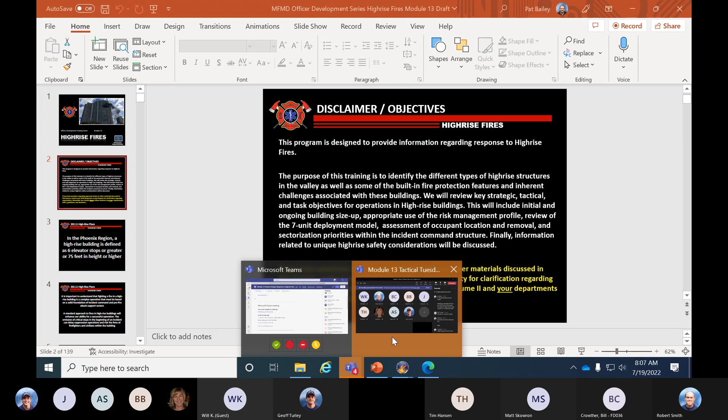Somebody, if you'll mute your mic, if you would, somebody out there's got your mic on. This is where it comes up missing. Let me see here real quick. Sorry, we can figure out who it is here. Anyway, please mute your mic. Sorry, please mute your mics here for those of you that aren't doing that.

But anyway, so we do East Valley Command training, and we covered high-rise fires. And then in an effort to try to stay consistent with our company officers, we're going to do high-rise training here in Tactical Tuesday as well.

So the biggest difference, you guys, and this is Captain Obvious stuff here, but obviously as we manage incidents in high-rise, they're much different than anything we do from a residential, even commercial perspective. They're a completely different type of event, which creates a number of challenges for us that are not readily seen in our typical fires that we respond to.

So you'll see some of the stuff we talk about here today. We'll talk about some built-in fire protection systems, some of the challenges with these buildings. We'll talk about strategic, tactical, and task objectives. We'll talk about some of the building size up, risk management profile, the 7-unit deployment model. We'll spend a lot of time talking about that this morning. And then we'll talk about some of the unique high-rise safety considerations and other things that come into play.

So with that, we're going to go ahead and get started. Once again, if you have questions, you can either send them to the chat. I've got Captain Paul Liddell with me here that'll try to monitor the chat. And if you have questions, you can certainly send them there. Or if you're not able to get through to him, just unmute for a second and ask the question, and we'll try to address anything you may have.

So in the Valley, we consider a high-rise in the Phoenix region anything that's defined as 6 elevator stops or greater, or 75 feet in height or higher. So once again, we've got a number of these. In the East Valley, we've got probably half a dozen or so, maybe if we look east of Price Road, a few more than that. But as we head west, obviously we get into Tempe. They've got probably at this point close to 50 buildings that are 7 floors or higher, counting ASU and all the new high-rise corridor they have. And then obviously when we get into Phoenix, we have 100 plus.

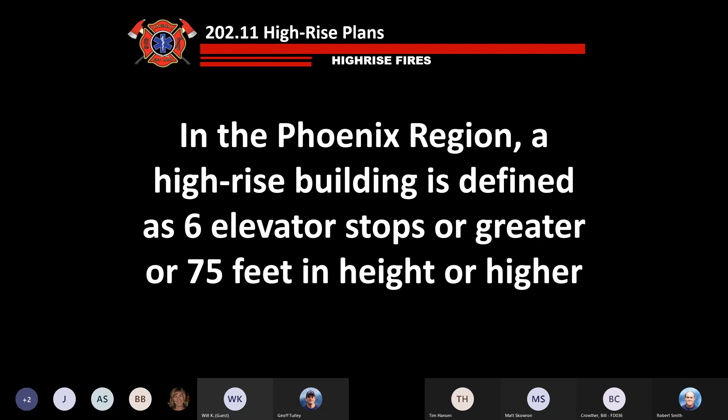But then what happens if I get to the 3rd floor and I run into a patient and things like that? We're hoping to answer some of those questions from the perspective of a company officer that aren't covered necessarily in the high-rise plan, but things you'll be expected to know what to do if we encounter them.

In a high-rise fire, understand that fighting fire in a high-rise building is a complex operation. That's an understatement. It must be on a solid foundation, and a lot of the things we do in setting up the fire make the difference in how successful we are in the outcome of the incident.

This is why you'll see the high-rise plan, which was developed about a year and a half ago now. This is a ROCC, our Regional Operations Consistency Committee, that put this plan together with a number of all our Valley agencies. So we're all on the same page, hopefully, and that's what we're hoping to see here is a standard approach to high-rise fires, and hopefully we'll have a successful outcome.

So let's talk about high-rise basics for a minute. For the most part, there's about 14,500 high-rise structure fires a year, which results in about 40 deaths, 520 injuries, and $150 million in property loss.

Probably pretty obvious if we were to ask what types of buildings create the most high-rise fires, and that's going to be apartments with 62%. We got some motel, hotel fires, dormitory fires, care facilities, and then office building fires make up the majority of our high-rise fires. And this probably isn't surprising either, that the leading cause of all high-rise fires is cooking, which connects with the apartment fire bullet point above.

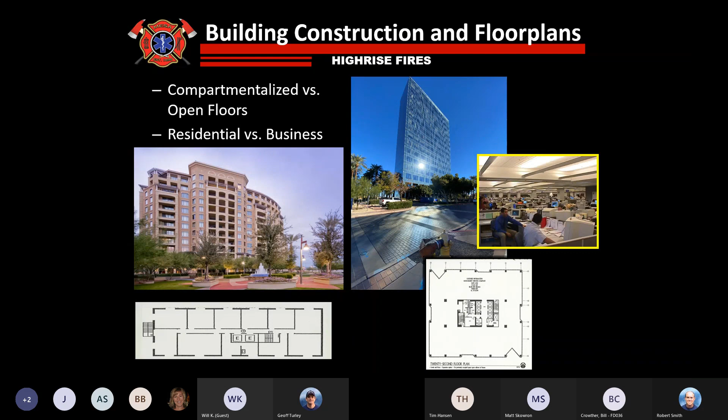When we did fire drills over there, it's pretty amazing to see, because some of those buildings hold over 5,000 people when fully occupied. So you can imagine when you hit the fire alarm and try to evacuate those buildings - and we've done that a couple times during drills - it's pretty amazing to see the number of people that actually come out, and you can also imagine the challenge of trying to enter through the front door and go up the stairs when all these people are trying to come out. So some of the challenges that come along with something like that.

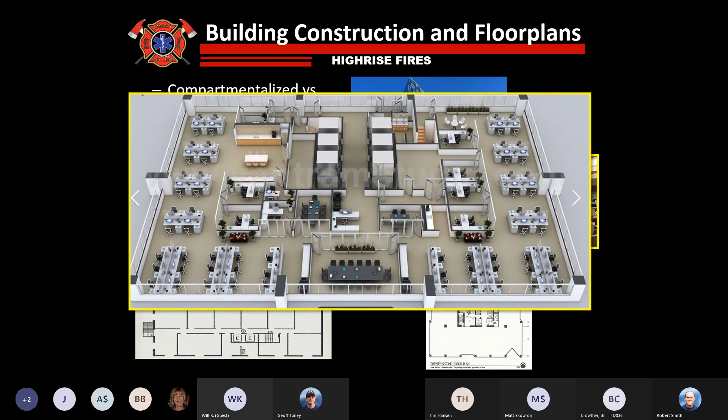This is just a floor plan of a high-rise structure, so you can see not only the layout, but some of the confusion you might have in a limited visibility situation, whether you're trying to gain access to a fire or conduct a search. It's somewhat similar to a restaurant fire, trying to work a hose line through the dining room - very challenging as you work your way in. There's chairs, other obstructions, 150 different hiding places for people to be. Very difficult to search a floor like this or address a fire in a floor plan of this nature.

A couple other things to consider with some of the floor plans - this is a couple examples of floor plans of some high rises in Tempe right now. You can see the cubicle farm kind of in some of these areas, and just the sheer office space. Some of these structures have over 10,000 square feet per floor. If you start doing the math, it's basically 2,500 square foot houses spread around throughout a structure. So as we talk about the difficulties of not only fighting fire, the amount of sheer fire load and other challenges, we're also talking about the ability to search an area of this size, which is going to require a number of crews, certainly if you have any limited visibility at all. But you can see the floor plans on just a couple of these here.

Another thing you might see on some structures, typically commercial buildings or maybe a real high-end residential structure, are convenience stairs. Convenience stairs are stairwells that connect two floors without a vestibule or a contained stairwell - you can see that upper picture on the left there. You'll see this a lot in law offices where they'll have offices over 1 or 2 stories, maybe even 3, with a stairwell connecting both that isn't an enclosed stairwell. That creates some problems for us as far as fire spread and other things, obviously, if we have a fire on that floor.

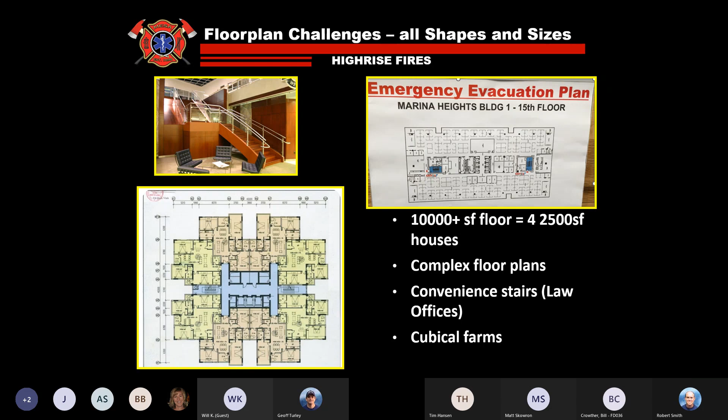We talk about configurations of structures. Obviously, if you look at the high rises around the valley, there's every shape and size that are out there.

This is one that I spent a tremendous amount of my time during my career. I spent the vast majority of my 37 years in Tempe downtown, so I've probably been to this building 50 times plus for some types of events as far as fire events. They have a trash chute that burned every 15 minutes during the school semester. They've remodeled it and sprinkled it now, but there were certainly some challenges that we had early on in this building in my career. We'll talk more about some of the challenges associated with these types of buildings in a few minutes as well.

Core construction. High rises have about 1,000 different configurations, but one of the things they started doing in the 80s was core construction. With core construction, you basically have all of your elevators, stairwells, plumbing, bathrooms and stuff in a center core, and your offices and other things around the outside. The good part is it gives a lot of window space for offices from a leasing perspective. The bad thing from our perspective is that fire can burn around you and behind you if you're not careful. So when we're having fires in core construction structures, we need to be careful if we get out on the floor, out of the stairwell, and understand there is a possibility the fire can come around behind us.

When we're talking about core construction fires, if we actually have a significant working fire, we would strongly suggest getting a second line in place prior to making that fire attack, so you have the ability to have someone protect your backside and we don't get ourselves into a bind.

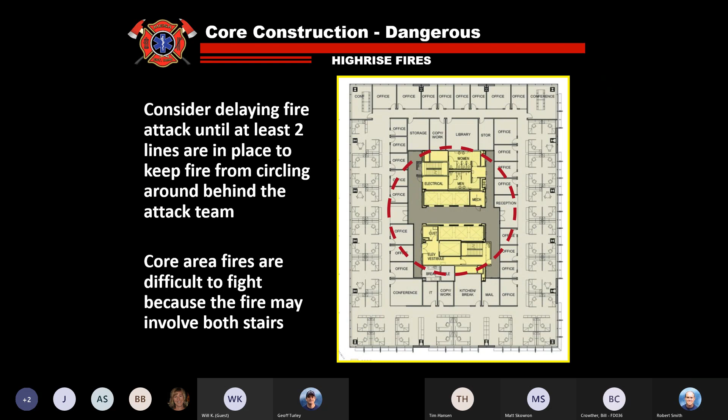We talk about some of the center hallway stuff. Like I said, you see this a lot with residential construction, and typically your stairs are going to be located on either end of the building. Sometimes you'll see some in the middle, depending on the length of the hallways. But these give us a different perspective for our fire attack. This is when we talk about selecting our attack stairwell versus evacuation stairwell. This is one of those where it's sometimes a challenge for us to determine the correct stairwell to operate out of.

We had a Tempe high-rise fire just a couple of months ago, and we'll talk about this later in the class. One of the challenges they had is they started stretching lines, got the line to the interior, made the fire attack. But as they were cleaning up and finishing up inside the apartment, one of the crews came out of the door literally across the hall, which was another stairwell. So they stretched 150 feet of 2.5-inch line all the way down the hallway to get to the fire apartment, and they were literally probably 12 or 15 feet from another stairwell that they didn't choose for the fire attack stairwell.

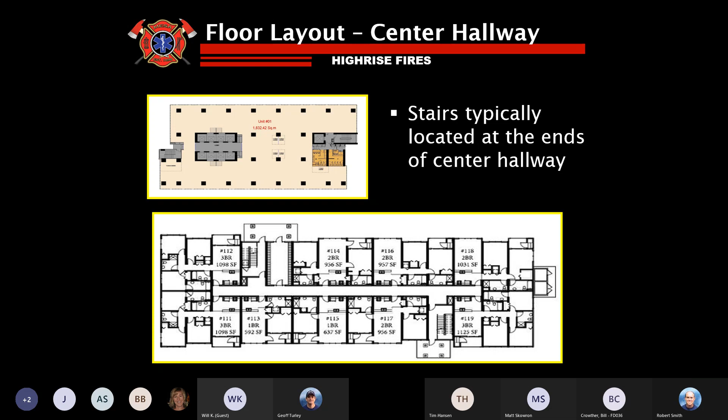So sometimes it's going to be a little difficult for us. We'll talk about stairwell teams and choosing the right stairwell in a few minutes, but just understand that some of these buildings can be very complex, and we may have to do quite a bit of work to try to get in the right place to operate.

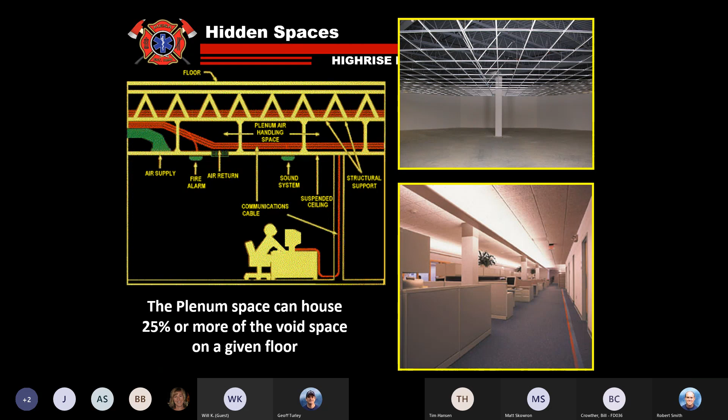Another challenge we have in high rises, especially commercial high rises, is the plenum space. For commercial buildings, some of them utilize the overhead spacing for cabling and other things of that nature. With drop ceilings and other stuff, we can have challenges with the void space being almost 25% of the floor area. So we need to keep that in mind as we talk about hidden fire and fire spread, making sure we're taking control of and looking into the plenum spaces overhead as well.

This is another slide here that I wasn't aware of as far as some of the challenges associated with this, but one of our chief officers, Chief Slayer, had talked about meeting with FDNY, and one of the things they talked about in some of their commercial structures is the overhead cable trays and the ones below the floor as well.

They talk about how 1 foot of this cabling can create up to 150,000 BTUs, equal to about 1.1 gallons of gasoline. So imagine places like State Farm and other data centers, we might have a tremendous amount of fire load either under the floors or above our heads that we're not aware of. We need to keep that in mind.

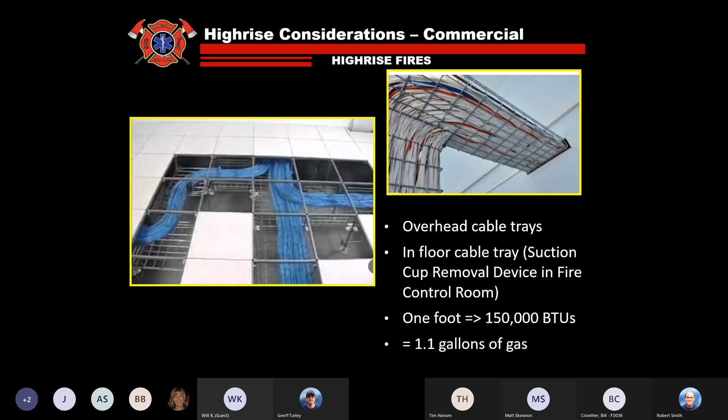One thing he told me, and I've never seen this personally, is that buildings with an in-floor cabling system like that are required to have a suction cup removal device in the fire control room. I haven't seen it myself, but my understanding is they should have it by code. As you go into the fire control room, you may encounter something that looks like a couple of suction cups with a handle that you use to remove the panels to access the subfloor.

Now that we've learned a little about the basics and some historical fires, we're going to talk about fighting fire in a high-rise building. We don't do a lot of this. This is a high-risk, low-frequency event.

I've been in the fire service now for 40 years, and I personally have only been to probably less than a half dozen that would be considered working fires, and most of those were a kitchen fire or something small that didn't extend out of the apartment involved. I was on the fire department when the Bank One fire happened in Phoenix and a few other sustained fires occurred, but I did not respond to them. I've probably been dispatched to between 50 and 100 high-rise fires, so I've been to a lot of them, but as far as actual working sustained fires, there aren't a lot of people in the fire service who have actually been to these in the East Valley or anywhere in the Valley.

So we'll talk about balancing early and often. We're going to talk about resources a whole lot today. Resources are one of those challenges we have on any significant fire. In one of our last classes we talked about big boxes and the resources required for big box incidents, but high-rise fires are even more of a challenge for us than that.

If somebody can mute their mic out there, if you would, for us.

So anyway, if you get dispatched to a high-rise fire, and while responding you happen to see any indications of a working fire, I would tell you to upgrade the incident to as much as a third alarm. I know most of our company officers probably wouldn't feel comfortable doing that. I'd certainly hope you'd go to at least a first alarm, but our command officers will, if you don't, take it right to a third alarm, because the resources required on an actual working fire are going to be a great requirement for us.

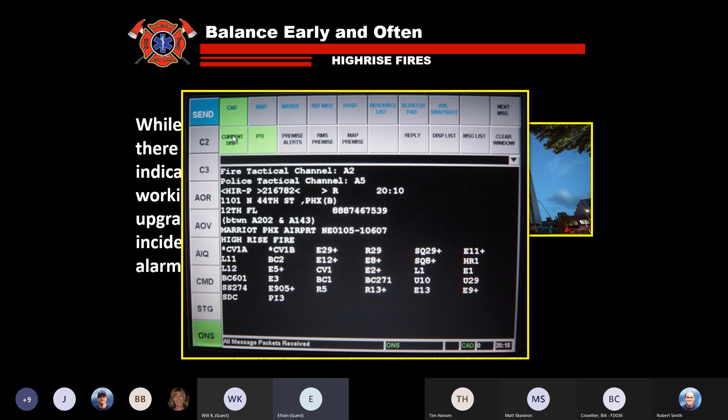This is an incident I had years ago, just to show you. The initial dispatch on this incident was at the Marriott. It said it was going to be a working high-rise fire, and there were 31 units dispatched on the original dispatch for a first alarm working fire. We got this on the MCT, which was interesting because it said there was actually active smoke and fire on the 12th floor. We thought it was going to be pretty interesting. You can see a lot of units on the scene. It ended up being just a small kitchen fire that was extinguished by the sprinklers.

But these are resource-heavy events, so just be aware of that. Don't be surprised if you have a lot of units come in, and don't be embarrassed if you call for several alarms when you see signs of a working fire, because they're going to be needed if we actually have a working fire.

One of the things we talk about here is balancing early and often. One thing we do right now, if we have a working fire in a residential structure or apartment complex, modern fire attack has determined that if we can knock the fire down early, that'll reduce the possibility of flashover and other challenges for our firefighters.

A lot of times people don't think about this in a high-rise fire, because we think of the 7-unit deployment model with specific things that need to take place to set us up for success. That's still true, but if you actually have a working fire within reach of a hand line, a 2.5-inch hand line, a stang gun, or even an aerial apparatus, it may be a consideration to implement a transitional attack on a high-rise fire as well, if indicated.

We'll talk more about that in a second. This is Chief Vincent Dunn. I believe he was FDNY - somebody mentioned Philadelphia, but I thought FDNY. Anyway, he mentioned that we need to plan on getting 100 firefighters on the fire ground and operating inside the building within the first 15 minutes of the event to be successful in a high-rise. So 100 firefighters is a lot.

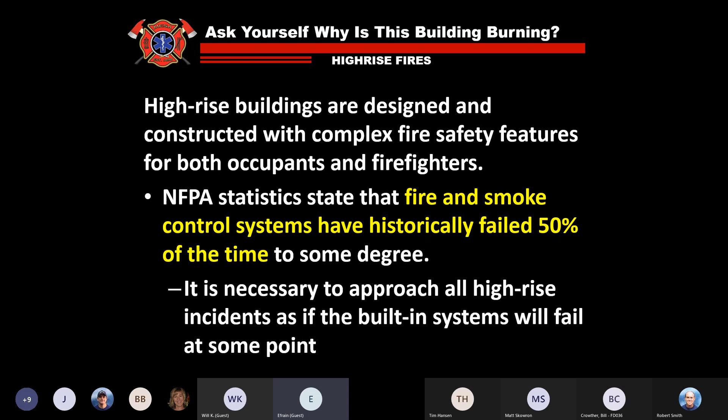But keep in mind there are other reasons we may have a working fire in a high rise that aren't just systems failures. Everything from arson, where somebody brings a 10-gallon can of gasoline up to the 12th floor and lights off a floor, may overwhelm the sprinkler system initially or completely. People may shut down systems for repairs, leaving them non-operational on that floor, portions of the building, or the entire building. The fire pump may be out of service, and other things may cause this. So just understand that built-in fire protection systems may fail.

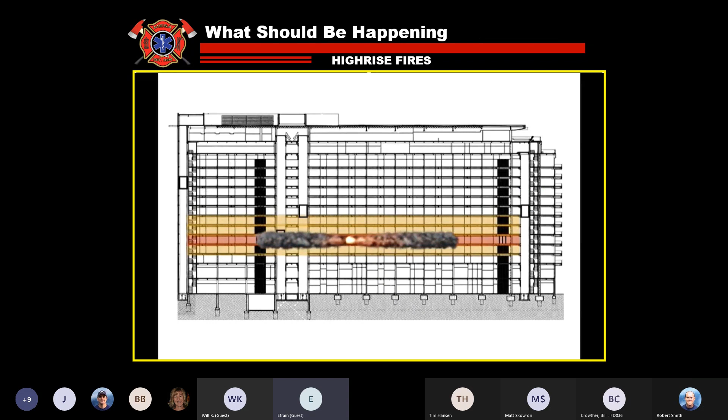I'll run it one more time while we're talking. Understand this is a perfect scenario, and it happens probably the vast majority of the time. Most of our fires in any high-rise building, a kitchen fire or something like that, typically the sprinklers activate, put the fire out, and we clean up some water and a little water damage.

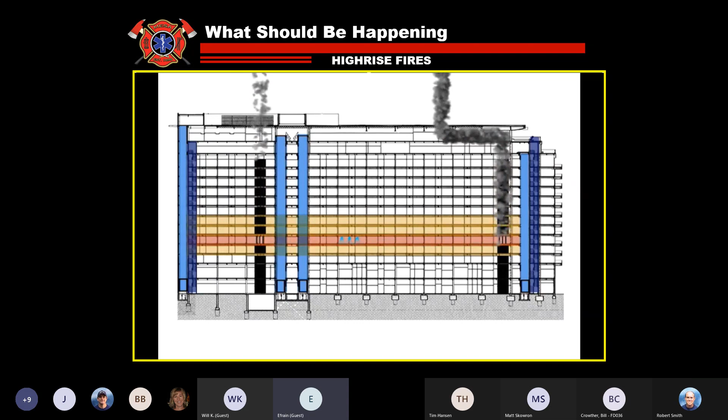One of the things that happened in the Tempe fire was once again sprinkler system failure. A couple of things occurred there: they had a sprinkler damaged near the fire that didn't operate, and another one where the deflector plate had been removed nearby, so it just shot a little laser of water straight down to the floor. Between the cabinet location and everything else, they had limited coverage of that building. That's why they actually had a working fire when they got to the fire floor in Tempe.

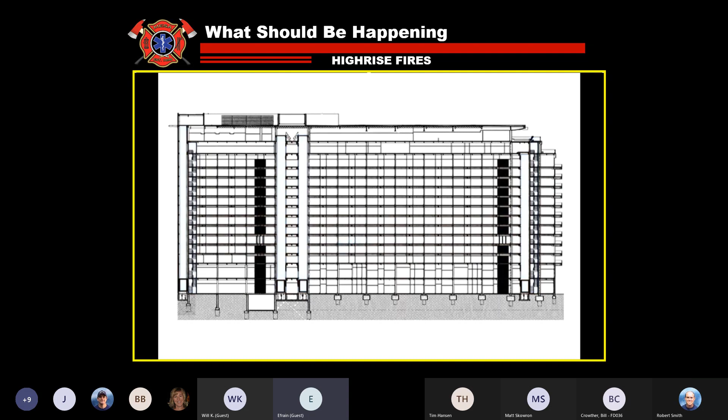For the first-in company, if you work in an area with a high rise in your first due area, I'd hope you become very familiar with that structure. Even if you're in the first 7 companies associated with the high rise, I'd hope you'd work with your responding battalion chief or deputy to tour these buildings and become familiar with all the different aspects, whether it's stairwells, locations, the fire control room, access to the roof, and other things that may be in place, so that if you get dispatched, it won't be your first time seeing them.

High rises are very complex buildings. If you've been into some of the fire control rooms, and I've been into probably 100 plus in my career, they're all different sizes. Some are the size of a small bathroom, others as big as 2,000 square feet. The one in the State Farm building is probably 2,000 square feet, with about 100 different TV screens, staffed 24 hours a day with about 5 people. So it's a completely different situation than other structures, where you may show up with just one annunciator panel and a printer, depending on the building, how old it is, and how the fire control systems are designed.

Keep that in mind as you arrive on these structures. Here's what a first-in company on-scene report might sound like: Engine 201 on scene with an 18-story high-rise building, nothing showing from the exterior, evacuation is in progress. Engine 201 will be University Command, offensive strategy, making our way to the fire control room for the report to follow. The follow-up report may sound something like this.

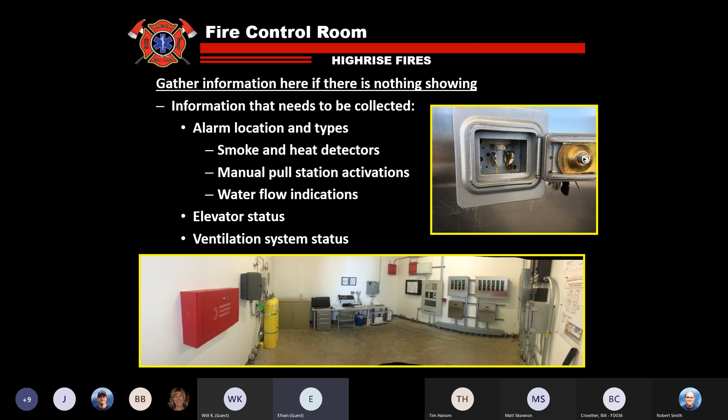One of the first things that first crew needs to do is assume command and start assigning companies. They need to go to the fire control room, locate the alarm panel, see if we have smoke or heat detectors activated, manual pull stations, water flow indications, and those kinds of things, which we'll go through individually here.

So one of the things you have to do, once again, you have the incident commander. One of your firefighters needs to go look at the elevators—make sure they've been recalled through the building alarm, check for smoke and fire conditions in the elevator shaft, whether the ventilation system has started pressurizing the shafts, and whether all the elevators are in phase one in the lobby.

One of the things we have to account for is all the lobbies, all the elevators, and make sure that they're empty. One of the challenges we've had on a number of high-rise fires over the years is elevators not being recalled and people getting stuck in them, or even failing and getting stuck on a different floor, maybe even the fire floor itself. So we need to make sure all elevators are down, open and empty, and in phase one in the lobby.

We'll talk about the fire helmet indicator lights flashing. Some of the new elevators—I haven't seen this on older systems, but some brand new systems have a little helmet icon, which we'll show you in a minute, that if it's flashing, indicates sensors for water, smoke, and heat in the elevator shaft have been triggered. If it's flashing, they're basically telling you not to use the elevators. Those are typically only on brand new buildings.

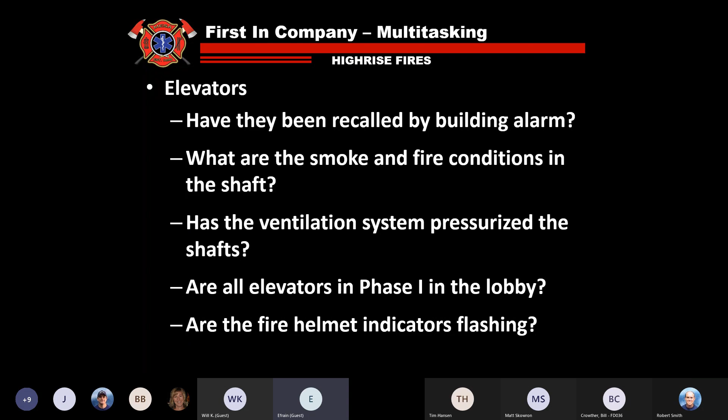Sometimes you'll see the fire helmet inside the elevator door, and sometimes you see it on the outside, this little fire helmet that may be flashing. One of your other firefighters needs to start identifying stairwells.

Just need to figure out how many you have which are marked with roof access. What are the smoke and fire conditions visible from the lobby when you open up the stairwell? Do you actually have smoke in the stairwell already, or is it clear as far as you can see? Which, if any, stairwells are being used for evacuation by the occupants, and which stairs have standpipes?

That's one of the first things we have to do. Now, that may be easy on some of our residential structures where we have just maybe 2 stairwells, or some of our smaller high rises. But for example, the State Farm building has 15 stairwells. So what do we do there? How do we clear all those stairwells?

How long is it going to take us to get enough firefighters there? You may have to get another company at some point to help you locate the different stairwells and figure out which one you're going to use. So these are some of the things that come into play as a company officer when you're trying to decide which stairwell to use, and the importance of going through the annunciator panel to hopefully get the right stairwell identified.

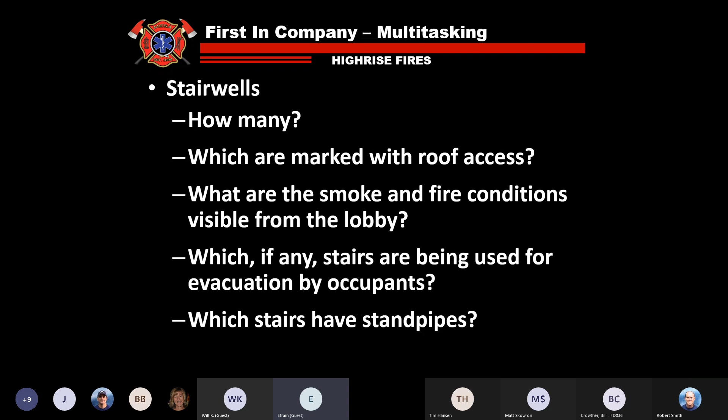So hopefully the incident commander initially, and we're hoping that a chief officer will arrive shortly to take that burden off your back, and you can move into the building systems. But at least initially, you may have to come up with an incident action plan, based on your size up and RP information.

If they're telling you you've got a working fire on a certain floor, some fire alarm control panel information, whether you can use elevators or not, which stairwell you're using, what floor you're going to. Obviously, if you have a problem on the 3rd floor, it's a lot easier to get access, though you may still have a problem with evacuation. Access to the fire itself on the 3rd floor will be a lot easier than something on the 17th floor, and then there's additional resources needed.

So, building system sector - we're going to talk about this and some of the challenges associated with it. In a lot of our drills, I'll go up and talk to the crews and they'd say, well, I can sit in this room, but I have no idea what I'm looking at. I'm looking at these panels with 15 different screens with all this gibberish about zone 5, suite 6, area 3, and you're going, I don't know what that is, I don't know what floor that is, I don't have any idea.

So we'll talk about some of the importance of the building engineering stuff, but building system sector is a very challenging sector, and we're going to try to break it down a little bit for you so at least you can know what to look for, what to talk about, what to think about, and the process as you manage the building system sector, at least until a chief officer arrives.

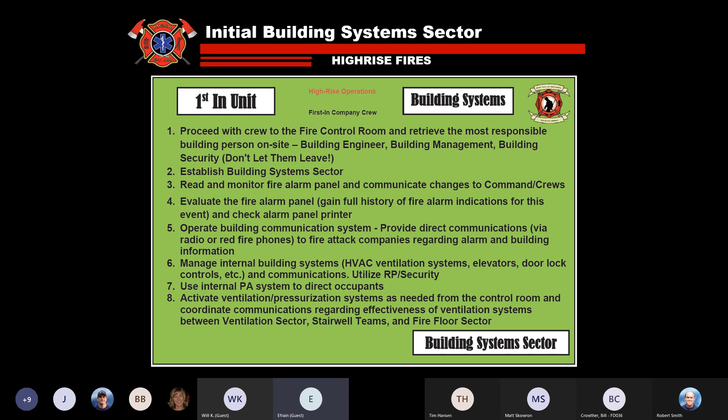So you can see some of the requirements here. I'm not going to go through each one of those because we'll get into the specifics as we go through, but basically you're responsible for interpreting all the information that comes out of, and collecting resources and distributing resources out of, the fire control room.

Distributing keys and other things, fire pump and those kind of things we'll talk about more here. The building engineer is going to be invaluable to you if you happen to be the building systems guy or girl. This is the individual who usually has the majority of the information available to us, and will have the most experience and knowledge regarding the systems that are available. If you can grab that person and keep them with you at all times, it's going to make your life a whole lot easier as far as being able to work some of the systems or evaluate whether they're operational or not.

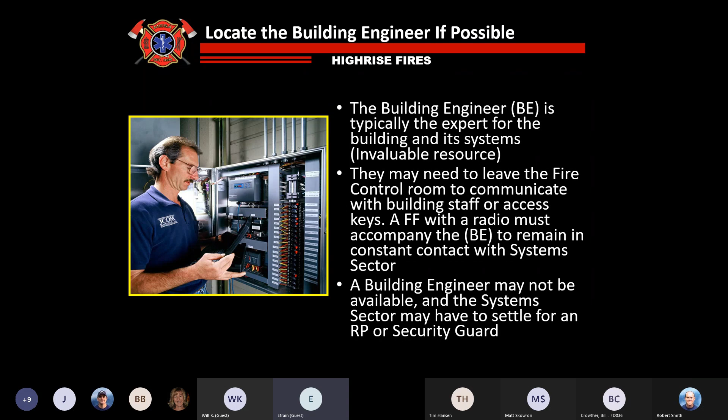The challenge you have is the building system engineer a lot of times is only going to be there Monday through Friday, 8 to 5. So Murphy's Law is that it's going to be a Saturday at 11 o'clock at night, and you have at best an RP or maybe a security guard.

So that's one of the challenges you have now. Sometimes these folks are also very educated and have the ability to provide that same information for you. But a lot of times they'll call in the building engineer so he can be there and provide the specific information you need. But you may have to rely on an RP, and that can literally be the lady at the front desk on a residential structure who's been working there three weeks and has no idea, with a list of phone numbers that are all bad. So maybe a challenge for us, but we'll have to do the best we can.

So our initial priority is going to be to read the fire alarm panel. This is what we need to find the history of the fire alarms for the incident. We need to scroll back through the alarm indications to see if we can learn where the initial alarm indication came from, where hopefully the problem started. This will give us the initial destination for the crew that's going to be making the fire attack. It typically is where we're going to send them.

And as a subsequent alarm sounds, we need to relay that information as well to command and crew. So if things started on the 8th floor, and now we've got smoke indications or water flow indications on the 9th floor, that information needs to be relayed to fire command as well as fire attack, so they're aware the fire is spreading, whether vertically or horizontally.

Also, do not silence the alarms. This is going to be one of those situations where, at least for a while, we're probably not going to silence the alarms, because from about every high-rise fire I've ever been to, you get about 20% compliance on people getting out of the building. People just don't leave, we know that. Now businesses are a little better, because a lot of those folks take their keys and never come back—they go home for the day.

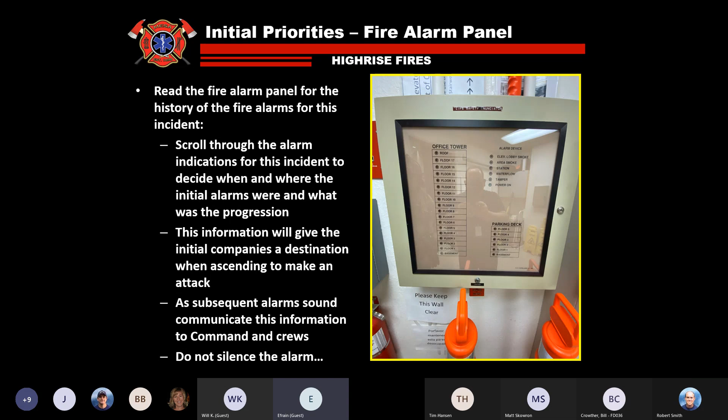But residential, I can tell you we had a number of times at Manzanita Hall in the middle of the night that we got dispatched to fires there, and literally a couple of times they said, 'Let's go ahead and evacuate the building to make sure we've got a complete all clear.' And at least 80% of the people were still in their rooms going, 'What? This thing goes off every week, we don't go out of here.' So be prepared, if you have to evacuate an area, to find people still inside the building. But don't silence the alarm.

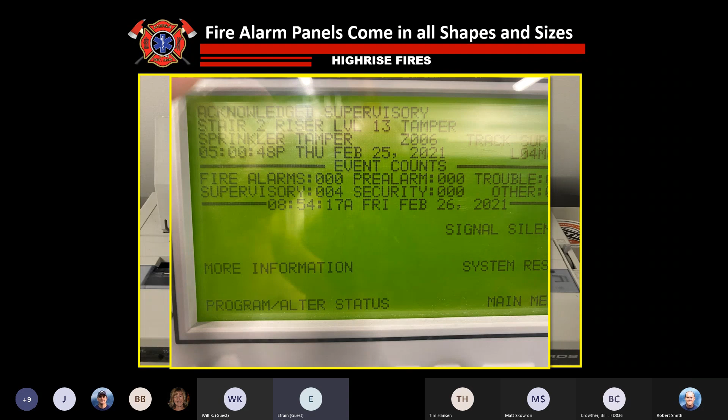Now some of these, the better and newer high-rises are buildings that are well-designed and managed. A lot of times you'll see a book next to the panel that'll have either a book of maps and zones, or even a breakdown of what these screens mean. But you also have just as good a chance, unfortunately, of going in here with an RP who has no idea what you're talking about, and you're trying to disseminate what this information means.

Some of the panels are a little more simple—they may be a little easier for us to understand. Some are small; you may have to try to scroll back through here and figure out where the last fire indication may be on this panel or this one here. So some of it may be a little bit easier. Other ones, you're literally going to be trying to interpret hieroglyphics here. I don't know, but maybe a challenge for us.

So we're starting to interpret the building systems to try to find out where the fire started. You have crew members checking for elevators, crew members working on stairwells. You're still incident command, and now you need to start gathering the keys. Hopefully you're going to find a key box somewhere in the fire control room. You're going to round up all the keys, the fobs, whatever you may have, and start bringing those to the lobby, in addition to the phones, which we'll talk about next.

The other thing I would tell you: inventory the keys, because when the fire's over, these building managers are going to be hoping to get all those keys back. They don't want to rekey 350 doors in a high-rise building because they can't verify that we have security for all their keys. So when you hand out the keys, make sure you write down somewhere, whether in the lobby or initially in building systems, just on a piece of paper, hey, Engine 201's got key set 4 or whatever, just so you have that in place.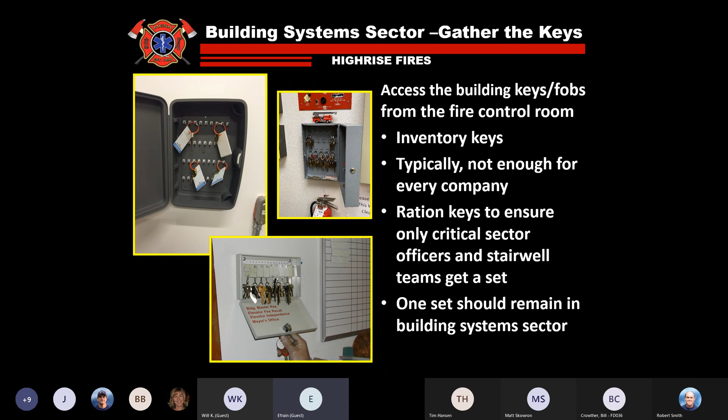And then in theory, one set should remain in the building system sector. Now, if you have the building engineer, he's probably going to have a set of keys himself, or the security guard may have a set of keys himself. And if it comes down to giving a set to the fire attack team versus one in building systems, I'm probably going to give that set of keys up.

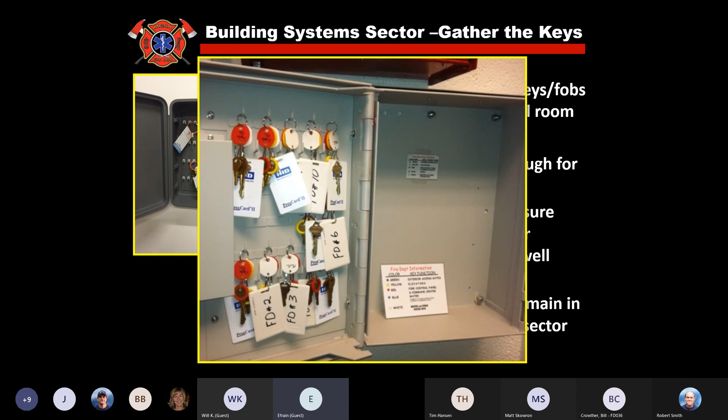There's another set of key rings you can see here. This one has a little bit of a description as to what's on the keys and what type of keys they have and things like that. The other thing you should do, if you're early in the process, is take a set of those keys and go see if they work.

I know we probably had about a 60% chance of actually having our keys that were operational and accurate in the fires that I've been to, or actually any kind of working incident. The key fobs, the business managers, business owners change, the suites change, all kinds of different things change. The next thing you know, the keys only fit about half the building or don't work at all. So I would tell you, take a look and see if the keys work, so that when you send them up there, they'll hopefully have keys that are functional.

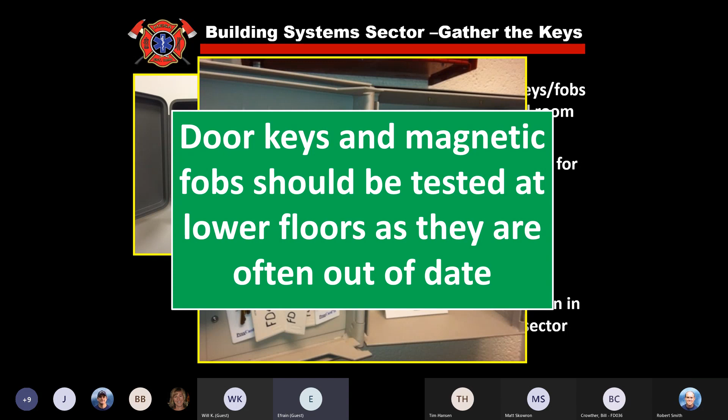Gather the phones. That's the next thing they're doing. You're gathering the keys and gathering the phones to start distribution. There are different types of systems, depending on how they're designed. The phones are going to allow the crews to communicate if radios become ineffective inside the building, and the crews can communicate with the building system sector via the red phones, and building system sector can relay that to command. It may decrease a little bit of radio traffic.

Now understand these phones are just literally like the old tin-can string setup, basic. You plug in and I can talk to you up on the 15th floor, you can talk to me down here, but nobody else can hear me, and I can't hear them. One of the other challenges, and I wish I knew more about these phones as I've done a little research, is basically you plug in your phone and it beeps downstairs in the fire command room.

It'll beep or buzz or something, and then they hit the button that says 13 intercom or whatever, and then you're able to talk between the two. I'm not sure whether you have to put the phone down each time and plug it back in to get it to beep. I haven't used them personally in the field to know if anybody in the room knows exactly how they work. But I know that if you plug them in, you have the ability to communicate back and forth between floor and fire control room, and in the fire control room you can hit the buzzer and buzz the phone on floor 12 or whatever, so they know somebody's trying to get a hold of them.

Typically, the elevator phone connections are in the elevator lobby. We'll show you what that looks like in a second.

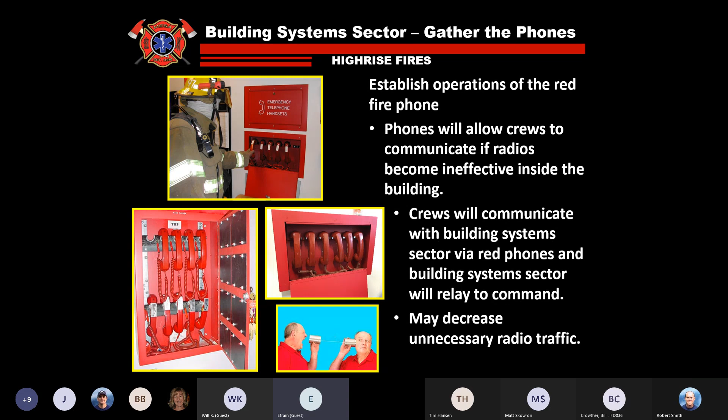This is what you'll have when you plug your phone in upstairs. As you plug that in, you can talk in theory to fire control. Now, these work sometimes, they don't work sometimes. I'm not sure, once again, when you have 4 different phones trying to plug in at the same time, how that works, who gets priority.

But understand this is an option, and this is what you'll get. You'll get a set of keys and a red fire phone, hopefully, as you make your way up to whatever floor you're operating on, and have the ability to communicate back and forth. They are there and they do work, it's just whoever's working the systems may have a little work to do to figure out exactly how to communicate.

Gather and distribute maps if indicated. This is a bit of a challenge, as you can imagine. A lot of times they'll have one set of maps in these rooms - like this building had a map with all different floors, but just one set. So you may hand out one to floor sector 9 and whatever else.

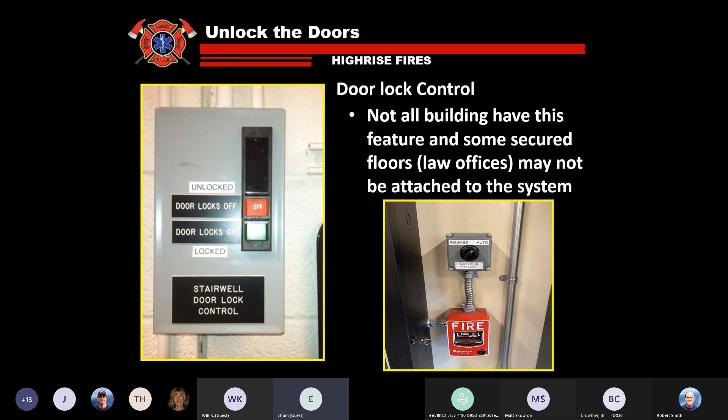Make sure we recall the elevators. Some of the systems, inside the fire control rooms, have the ability to recall the elevators there. You can see what floor all the elevators are on, whether they're operational, and control them all from that area. So if they haven't been recalled, make sure all the elevators are recalled, down, and empty.

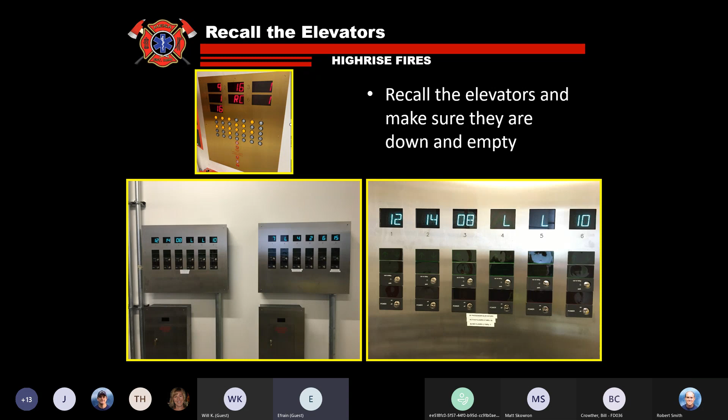Pressurizing the stairwells and other areas is one of those things where hopefully you have the building engineer with you to determine whether or not this is needed. A lot of these systems are designed to work automatically based on smoke detectors and smoke removal, so one thing you need to check is just to make sure they are operating and not in fault mode or shut off. You're probably going to need to work with the building engineer to determine which ones need to be pressurized if they're not operating already, whether you need to manually override things, and you can coordinate with the stair teams as to whether you have smoke in the stairwells to evacuate that smoke as well.

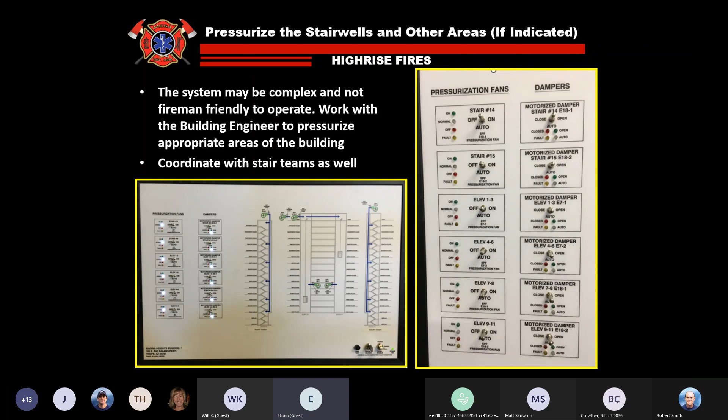Some of these systems are very exotic, some are very complex. You can look at some of these here, it's got a whole operational list of instructions over here to the right. It might take me 5 minutes to read through those, but you might be able to figure out the system. Just understand, if you have a building engineer, it's probably going to be much better for you to understand these. Some of these high rises have tremendous systems that, if operational, can do a lot for us as far as removing smoke, pressurizing areas that need it, and exhausting other areas that don't.

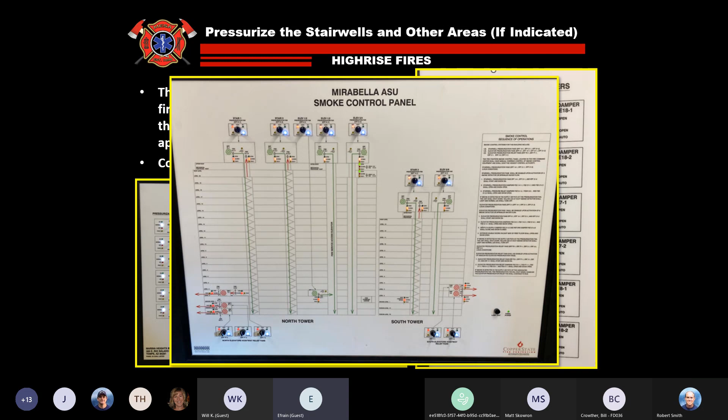Confirm the generators are functioning if necessary. If we have power outages or areas with compromised power, every high rise is going to have some type of generator, it's just a matter of how big and how many. So it may be something, if I'm working with the building engineer, that I may need to start the generators.

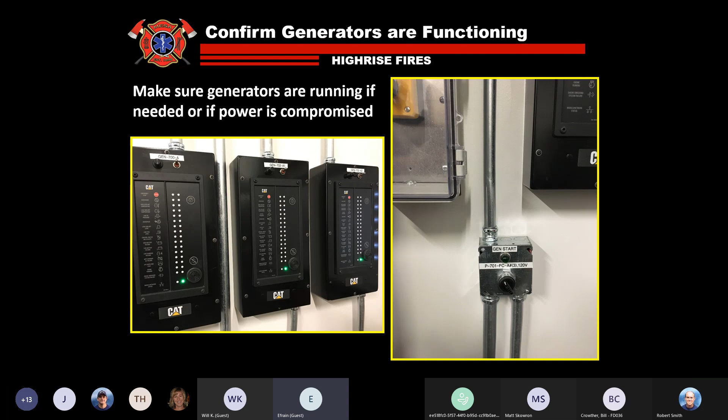Confirm the fire pump is operational. If you're like me, every one of these I went and looked at, I don't know what I'm looking at. I don't know what to turn on, what not to turn on. You got giant fire pumps next to huge electrical panels, and I'm trying to figure out which button to push to turn this thing on. So being aware of this, having the systems and having a building engineer with you if necessary is important. If the system is not operational, typically they come on and operate appropriately.

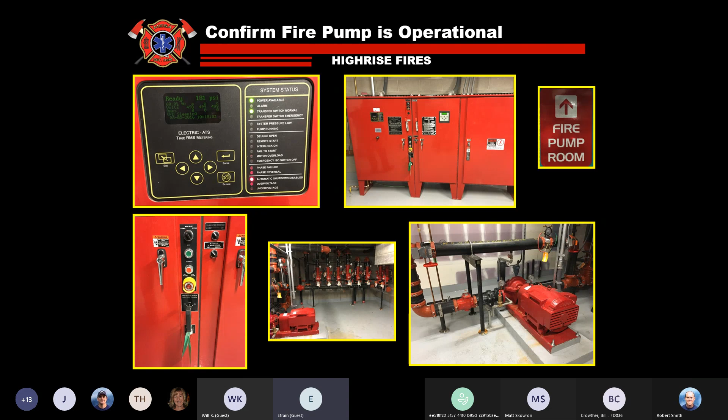But there are times they fail, and it may require some troubleshooting. You need to go out and see if the power's on, if it's shut off, if it looks operational, and check the pressure gauges on either side of the valve here to see if one is lower than the other. Does that mean we don't have water coming in from the street side, or is there no water coming out of the pump side? These are just some of the things we need to look at and be familiar with, because if the fire pump is not operational, we've got problems, and that's probably one of the reasons the fire is continuing to build. We'll talk more about that as well.

So utilize the public address system. This is another thing that building systems does.

We're going to decide whether it be just by yourself or depending on the situation, you may get on and tell people, hey, evacuation, all units or all occupants need to evacuate the structure and please utilize stairwell 1 or the east stairwell to evacuate the building, if you've determined which one's going to be the attack stairwell versus evacuation stairwell. That may also be in conjunction with command.

Command may come back to you and say, hey, we need you to get on the PA and tell all residents above the 10th floor to evacuate in place, to stay in place. And everybody below floor 10 stay in place, everybody above floor 10 evacuate the structure, or whatever. So some of that information may come based upon the findings you have or what you've seen on arrival, and then other information may come from command or somebody else as far as direction on what information you need to get out on a PA system.

In theory, you could also use it to advise firefighters if you were evacuating the floor and weren't able to communicate with them, because communications is a huge problem in high rises. You could probably even get on and tell crews, hey, we're evacuating the structure, as a worst case scenario. So fire attack teams too.

So we've already gone through the first arriving company. We've talked about incident command, and we've talked about building systems. So that first company is busy. You can see all the things that need to take place with that first crew of 4 is going to be incredibly busy. But if you have a list of things to do and hopefully have a plan, hopefully you can address what we have going on until a chief officer comes and replaces you.

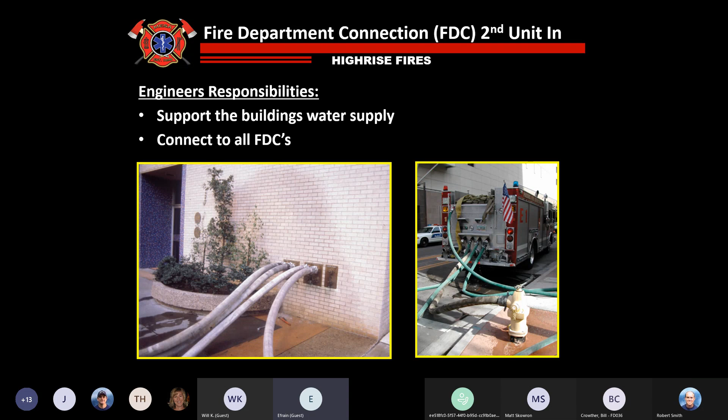Some of our buildings have large diameter Storz fittings, and others have just 2.5 inch inlets. We need to connect to all of them. Now, one of the things we'll talk about in a second here is: does your engineer or your temp engineer know which one to pump? Seems simple, but I personally have witnessed some pretty interesting things out there.

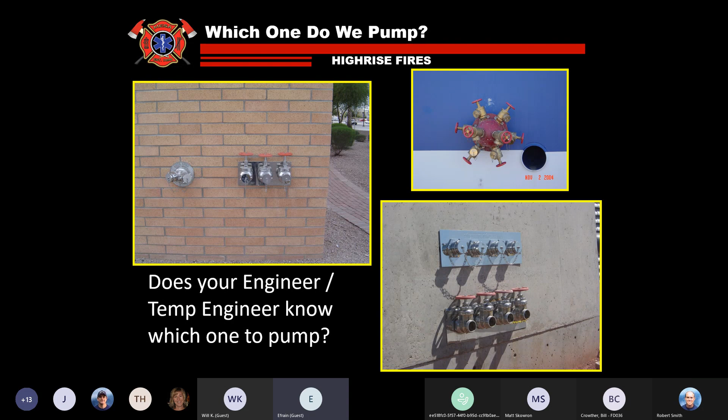These here are fire pump test valves, all the valves here. Sometimes I'll see people hooked into all 5 of these or all 7 of these, and you're going, what are you doing? I'm pumping them all.

And you go, well, that's really not what it is. The ones with the valves on them are actually designed to test the fire pump, they're actually discharge versus intakes. Now, I did read that in theory, if you have a standpipe system that's down and a certain type of valve, you could actually pump back through these into the fire pump if your standpipe system didn't work.

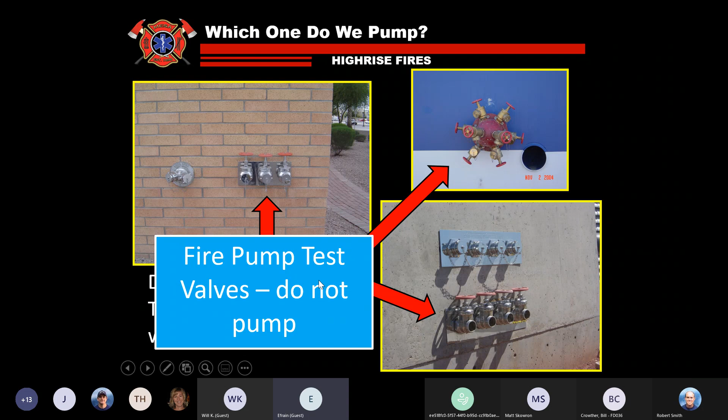But I would just tell you for now, to not confuse you, just pump the sprinkler system. Just pump the inlets you have here. Obviously, you can see the Siamese here that we're connecting into. These are pump test valves, and don't hook into those when you're pumping the system.

Some FDCs are marked better than others. One of the nice things that Tempe did is they keep it simple for firefighters. They got labeling on them and tells you exactly how much to pump, what building they're pumping, and all that kind of stuff, which is really nice.

Because you can imagine pulling up on something that has 4 or 5 of these outside, especially one of these large complexes, and you're going, which one feeds which building? I have no idea. You're going to pump 17 different inlets here as you're trying to figure out which one is for that building. So hopefully they're marked well, and you can figure out. Some are obvious. If you only have one building, probably you're going to be pretty obvious as to which one you need to pump, but just make sure you can do that.

Now, the other thing, this is a big thing to understand also, we don't pump the fire pump. If the fire pump is working, we don't pump the sprinkler systems because they have a clapper valve. So if it's working and operational and it's pumping at 200 PSI, we're gonna have to pump at 205 to get even past the clapper valve. So you need to be hooked in, need to be ready to support the system.

And if the system's not working, we need to pump that system. But to sit there and basically just pump, you're pumping at 200, the system's pumping at 200, you're basically just turning water until you're damaging the truck or it overheats. But we need to be set up in place so that we can either pump it if necessary, if it's not providing enough pressure or water, or if it fails, that we can be operational.

But just understand the way it's designed. If the fire pump is working on these, especially these bigger high rises, you're going to have to pump pretty hard to freaking get past what they're doing until you're basically not adding to the system at all. Some of this stuff here is going to be over my head.

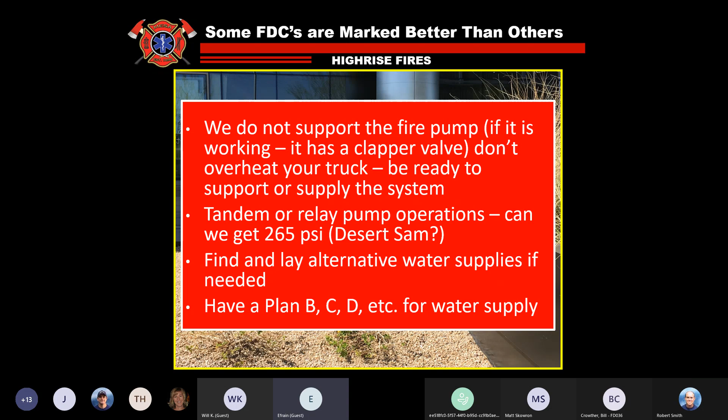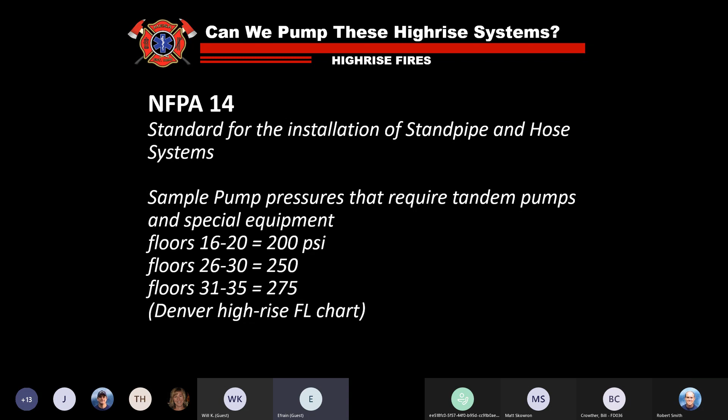We're going to talk more about that in a few minutes on some of the future slides as well. These are some challenges you have. You look at some pressures that you're going to need, this is from NFPA 14, but we have buildings that are 26 to 30 floors, 250 PSI. We're looking at 275 for floors 31 through 35. Phoenix has plenty of those buildings, so we need to be prepared, but utilize the approved pump discharge pressures per your department's SOPs. We need to make sure that we're familiar with that and understand what we need to pump out if we do.

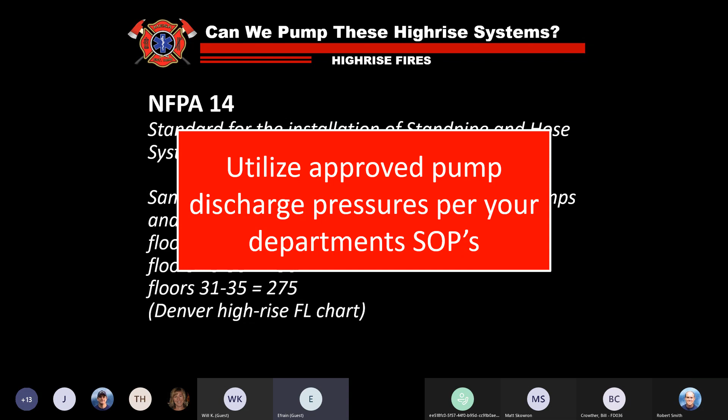This one I can't emphasize enough for us: bring your passport. Basically it's your ticket to the show here. I can tell you that if you have a working high-rise incident, if lobby's doing their job, they're not going to let you go up until you have a passport in hand. Because your ability to park next to a high-rise may be difficult, you don't want them to have to send you back out to your truck if you show up without it. So bring it with you.

In theory, you're not supposed to go above the IDLH and work without your passport in place, and it's for accountability purposes. Make sure you have it with you, because I know in one of the recent high-rise events they had in Tempe, they had to send 2 or 3 companies back to get their passports. So make sure you bring it with you.

So, fire attack team now - we've split it off. You've got your engineer outside pumping the standpipes, or at least setting up to pump them. You're going to come in through the lobby with your air bottles, irons, and PW can, pick up your fire phone and set of keys. Hopefully they've already identified the attack stairwell, which will be the one closest to the fire-involved apartment, office, or area - a compartment, whatever that may be.

So you're going to grab all your stuff, go in the stairwell, and as quickly as possible make your rapid ascent to the top of the building. Check all floors - when I say check all floors, it may be as simple as looking through the glass panel on each door to see if the floor is clear. If you have a center hallway and can see all the way to the other side and it's clear, we continue up until we find the fire floor. But at least open the door and peek.

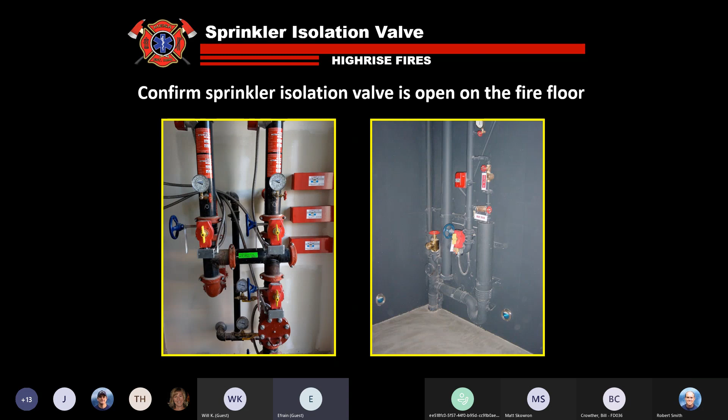So this is where we talk about the stair team now will make entry into this floor, mask up, go to that door, tick the door and stuff and see whether we have active fire in there. If it looks like we're attainable from the standpoint, we will pop that door open.

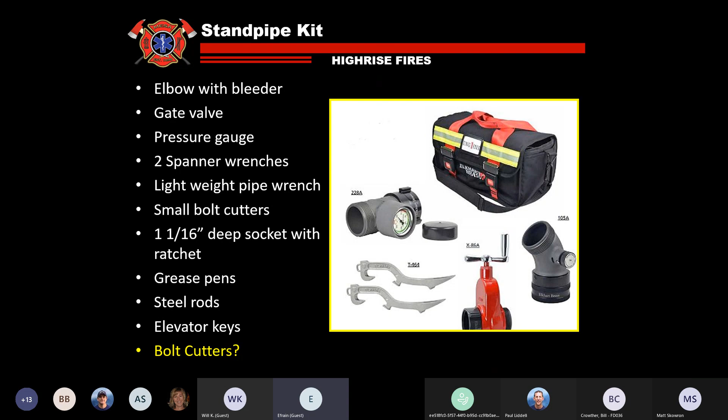Standpipe kit, just to give you a general idea of what's in some of the standpipe kits. I think this is similar to what Mesa has. I think this is Gilbert's kit here.

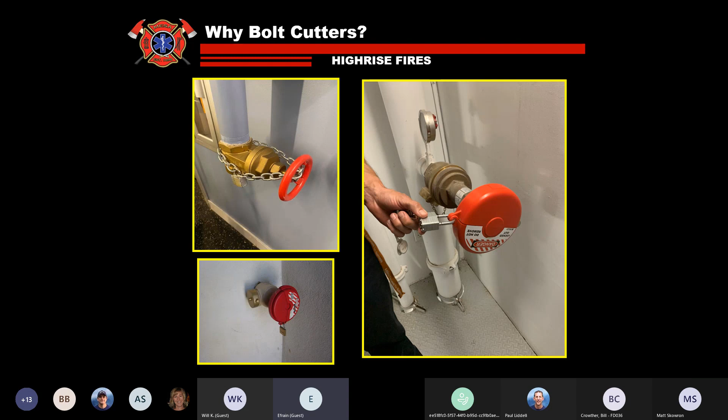Here's one of the reasons we take bolt cutters. Probably in some cities you don't have any chains or protective devices on your standpipes, but any place in Tempe does, especially any place with students in Tempe, because otherwise people open the valves, stuff junk in them, or break them off and steal them. So consider having a bolt cutter with you when you make your way to the top.

So now the fire attack team has to decide the method of ascent. Do we take the stairs or the elevators? It's a big decision, because if we're going to the 17th floor and take the stairs, that's going to be a lot of work.

If we take the elevator and go to the 12th floor and walk up from there, it's certainly going to give us a little bit of a break, but we also need to make sure the elevator is secure and safe to travel in. So that's one of the decisions you'll have to make coming into the process.

If we decide to take elevators, the stair team obviously needs to take the stairs and work their way up. But if we decide to take elevators, anything below 10th floor, we don't use the elevator, we tell you to just take the stairs. Anything 10th floor and above, we say elevators may be considered.

This is one of those cases where, as part of our discussion with the ROC committee and others, we said, well, if you're going to the 25th floor, does it make sense, if we've got a clear operating elevator, to go all the way to the 25th floor with all the equipment by stairs?

So that's a judgment call you have to make as a crew, but for the most part, the valley has decided that elevators can be used for that situation, as long as they're in phase 2 firefighter feature set up and that they're prepped and safetied.

Now, this isn't an elevator class. I know Chief Alexander is going to put together an elevator class for Highrise, and there's a lot of things that come into play with an elevator that we can't get into here, because this class will last 6 hours

versus the 3 that it's already going to last. But we talk about making sure the elevator's prepped and safetied. We talk about making sure that if you have the newer elevators with the flashing helmet, which means that either a smoke detector, water detector, or heat detector is operational, which means the elevator shaft is compromised.

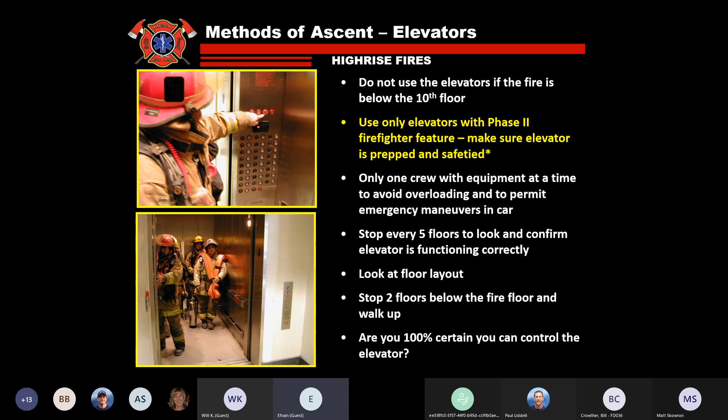But just understand stuff can fail and problems can occur, so we need to make sure the elevator is operating correctly. We need to make sure the fireman's feature, the door opens and closes before I leave floor 1. I'm going to make sure everything opens and closes correctly and is operational before we take the elevator or the stairs, whichever is appropriate, and that's a decision you have to make as the fire attack team.

Then we're going to confirm whether or not we have an active fire in the office, apartment, or whatever it may be. We're going to assemble our hose line, which we'll talk about in a minute. Before we open the door onto the floor to make our fire attack, we need to make sure the stair team, the attack stair team, is out of the stairwell.

Because the last thing we want to do is open the stairwell or the door to the floor, contaminate the stairwell, and still have the attack team somewhere in there, or we haven't cleared it yet. When we're ready to make the attack, if we have a dirty floor and an active fire, we need to notify command that we're ready to make entry and that the stair team is aware and secure.

And then once we identify the fire floor itself, we go from fire attack team to whatever that sector is. If I'm on floor 15, I'm now sector 15 from fire attack team.

One thing strongly suggested from after-action reports from different agencies is to provide a CAN report as soon as possible. So if you get inside and have heavy smoke and heat in the hallway, or you get to the apartment and it's well-involved, make sure you relay that information so command knows what they're dealing with.

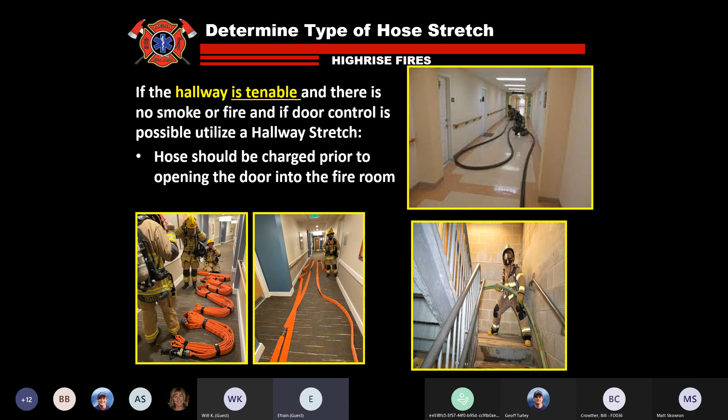Remove the kinks. This is just a reminder for anything we do. I know in one of the drills, what are the chances, but we had a 2.5 inch line get under a door threshold, and they charged it, and you couldn't get it out. We had to shut the line down to get it out. It was probably reducing our flow by 50% when we did it. It was just kind of one of those, what the heck, what are the chances?

But 100% here, get rid of all your kinks, just like anything else. You don't want to restrict the flow any more than you have to. We're using 2.5 versus 1 3/4 because that's what's designed, and what we've determined is the correct amount of flow, pressure, reach and penetration that we have to properly address an active working high-rise fire, and that's where all the value is going to here.

Just understand, like anything else, check for heat on the door before opening, whether it be the fire floor door, or the apartment or whatever is involved. You may need to use irons to get entry.

Search and rescue is always our top priority, but like anything else, is search and rescue practical when you've got a cubicle farm with a 10,000 square foot open area with zero visibility? Yeah, it's going to happen at some point in time, but we're probably going to search as we work. We're probably not going to be, unless we have a known rescue.

If somebody calls and says, hey, we've got somebody trapped in the office on the northwest corner of the 15th floor, we're going to go there. But if we just have an unknown rescue, no known rescues, or maybe even an occupant reported or resident reported all clear, we're probably just going to search as we go, because it's not practical to think we're going to do a right wall search on a 10,000 or 20,000 square foot cubicle farm. It's just virtually impossible, and it will never happen.

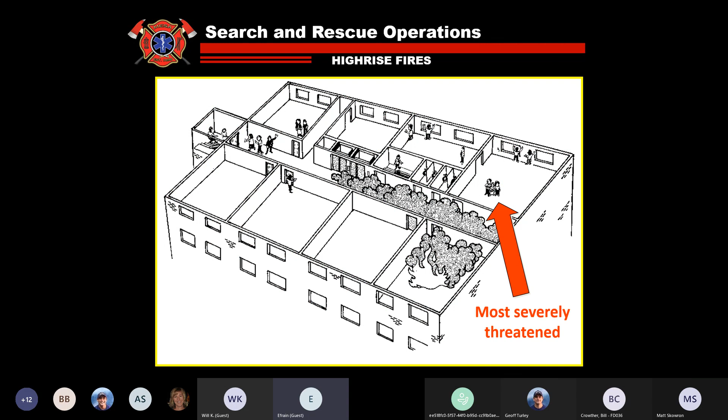Smoke and fire conditions are going to dictate our method and order of accomplishing our search and rescue. If we have clear conditions, we can search a floor pretty quickly. If we have zero visibility, that same search will take a dramatically longer time or require a number of additional resources. And then we have to decide, are we taking people away from the fire, or do we put out the fire to take the fire away from the people? This is a little Captain Obvious stuff, but the most severely threatened we address first, followed by the less severely threatened second.

Hose lines, and standpipe cabinets - do we utilize these in high-rise buildings? We can, but we have a couple things we need to keep in mind. High rises, especially residential high rises, some of these places have 300-foot long hallways. The Salt River Casino, I think Mike Mink said they have 300+ foot long stairwells and hallways.

So you can imagine, we've got 200-foot pre-connects. If we use those, we can't get all the way to the other end. If we take 50 feet, then we're going to lose 50 feet coming out of the floor below as we hook into the standpipe and everything else. We got 150 feet on the floor, and then we've got to get into the apartment and work our way to the back of the apartment. So is it practical to think we can get to every inch of some of these fire floors, or certainly some of these commercial floors, from the stairwell?

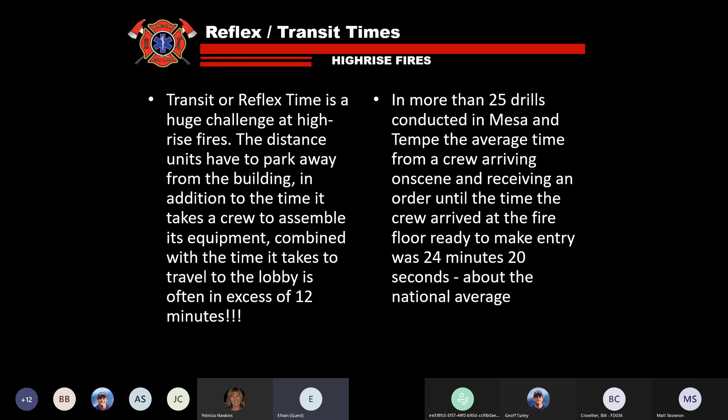It's ridiculous, but these are like special ops incidents. These are things we need to be prepared for, do correctly, so that when we get there we're prepared and safe, with backup plans in place. A lot of it's just transit time, the time it takes to get to the 14th or 15th floor, whatever floor you're going to. So it's not unusual—that's also the national average, about 25 minutes between arrival and fire attack beginning on a working high-rise fire. So we're about average from that perspective.

Another question: what do we do if the fire's on the first floor? So we pull up on the high-rise with this big 7-unit deployment model and the fire's on the first floor—now what do we do? That can create huge problems because fire on the first floor cuts off the lobby, cuts off natural escape routes for occupants, may eliminate our ability to access the control room, and may require fire attack to come directly off the engine companies at street level. So we may have to treat this, at least initially, kind of like just a house fire or anything else.

We may come straight off the trucks with our hand lines and make our fire attacks on the first floor if the fire's on the first floor. And then building conditions may need to be evaluated by crews accessing the building from aerial ladders above ground level. This may create issues with evacuation, having to come off the second floor from an exterior perspective if we have complete contamination in the lobby and a working fire on the first floor, creating huge problems for us. But we need to be prepared for that as well.

Breaking glass. We need to be careful about breaking glass. I'll tell you, first of all, breaking glass in a high-rise is extremely difficult to do. They're heavy, thick panels and difficult to break, but they will break. We just need to be careful because, obviously, you hear stories, I haven't seen actual videos of it, of sheets gliding for quite a distance. If you get a significant size piece of glass, instead of breaking all at once like a shower door, it just breaks into a pile, or like a car door or car window, these things can come out in shards and travel for a distance.

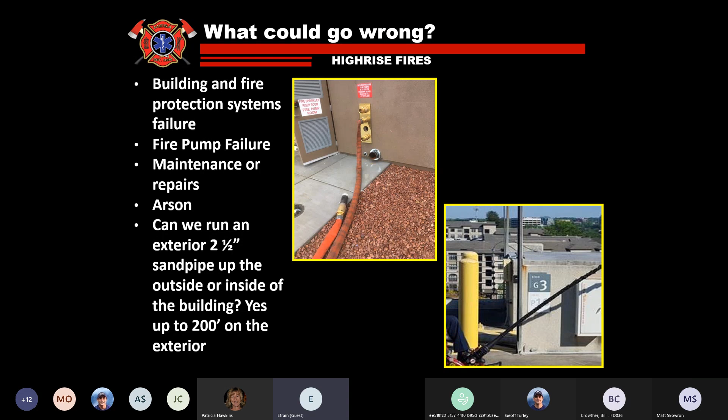No floor 13 — kind of interesting, but there's a lot of buildings that still don't have a floor 13. Keep that in mind. Of course, Murphy's Law says it's between 12 and 14, or it's on floor 12, and you say 'go to the floor above 13,' but there isn't one. They're looking around for floor 13 and wondering why there's no landing at 13. It's not a big deal, but if you have something between 12 and 14 or 12 and 15, you may have some confusion about what floor you're going to.

FARS system, we're going to move very quickly through this, but understand a lot of the new high rises, everything in Tempe built in the last probably at least 15 years, which is the majority of their new stuff here, have a fire system, the firefighter air system. Basically consider it a standpipe with air, which is what it's designed to be. The problem we have with these is not all of them require storage for their systems.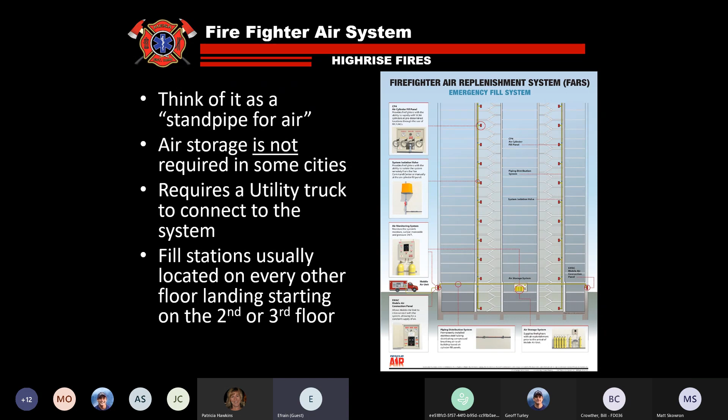So a lot of times, typically you have these fill stations every 2 to 3 floors. A lot of times they're located near the elevators or the stairwell landings, but you can obviously refill bottles. This is what the system looks like, and some of the cabinets, what they would look like.

Here's some of the challenges you have. Some of the systems only have a couple of bottles. These 2 bottles here will probably fill 6 to 10 bottles, and then you're empty. So this has to be supplied by a utility truck with a compressor to be effective here.

Also keep in mind, when Tempe first put these in, we thought great, we don't have to carry bottles up anymore, this is gonna be the best thing ever. Well, it doesn't really work that way.

We found they did some testing, I think it was Mike Davis or somebody, and they found they were only able to fill 4 or 5 bottles an hour, some kind of crazy number. And that's if we don't have people on 3 floors trying to do the same thing at a time. So it's not really effective. It can work a little bit, but it's not something you can go in there and say, hey, we'll all be fine, we'll just top off our bottles every 3 floors or every 10 floors. I wouldn't necessarily say that.

So it's an option, something that's good. Just need to make sure you get a utility truck in there for support, and be in a position to understand that you need to bring your own bottles anyway to start with.

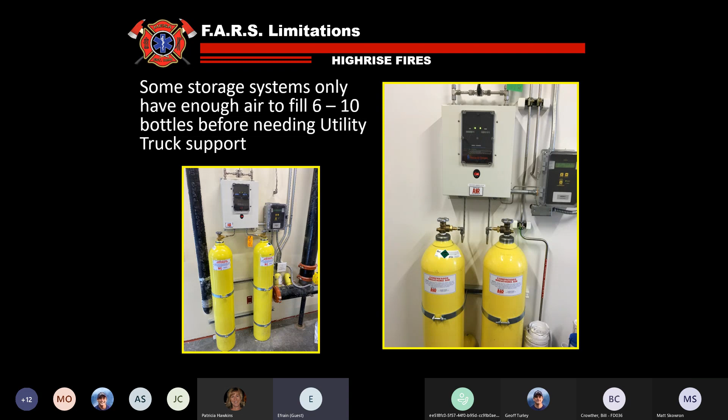Now, Phoenix Fire has a high-rise truck. They have some different things in it specially designed for high rises, and any working fire in the system will get the Phoenix high-rise team, which is engine 1, 2, 9 and a few others. They have specialized equipment: telescoping ladders to utilize inside the elevators, air bottle carts, hose carts, specialty hand tools, interior master stream nozzles, standpipe repair kits. They've got a system designed so they can literally cut a piece of the standpipe out and replace it with other materials they have.

So obviously not going to be a quick thing, but if you have a fire that goes for 19 hours like the one in Philadelphia, or 3 hours like the one in LA, you might have enough time to do that if you had a major problem. But anyway, so they have some different things.

They also have some radio kits, and I'm not sure if we've looked into those yet, but Tempe's in the process of buying 2 that you can bring inside and boost the radio signal. It's a little Pelican box that you bring inside, with different equipment inside, I don't know if it's antennas or boosters or whatever, that allows additional radio communication capabilities from the interior of the structure.

But this is some of the high-rise equipment they have. They have a set here that's 300 feet of supply hose, air supply hose, and then a distribution system as well. So you can bring that up to the fire floor, run it down through the stairwell or wherever out the door to an additional utility truck and fill bottles.

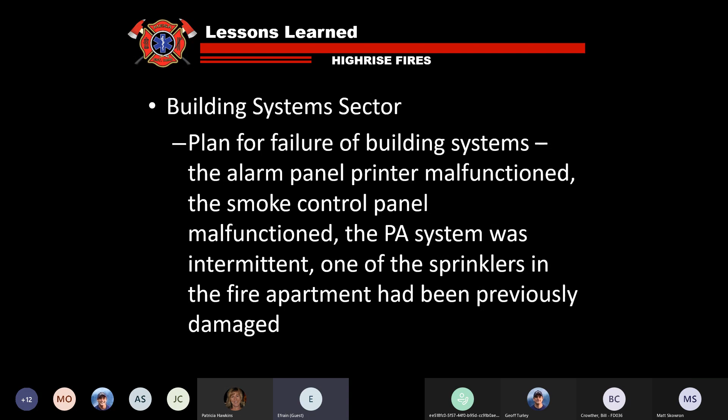The PA system would work, and then all the lights would flash and it would go off and not work. It did that halfway through the incident, coming on and off, and you never knew what was going to happen. One of the sprinklers had been previously damaged, so it didn't actually put the fire out. Things like this can happen.

The attack team, understand that these crews go up at different levels, so be careful as far as crew fitness. The challenge is providing good, accurate reports - that was one of the challenges command had. They didn't get good reports from interior crews as to what they had. You're flying blind outside, you can't see anything. All you're doing is relying on crews' reports, and they didn't get real good reports initially as to conditions and fire status.

Lobby, once again, huge problems trying to find space in there.

Have a system to coordinate passports, and understand organization is critical at high-rise events. Initial sector development or deployment is going to be critical to our success in these operations.

As Chief Lachlan mentioned, this may not necessarily make logical sense that this is the system we need to use, but we found through our training and drills, and through other events that have occurred nationally and internationally, that our system will be effective if we do have a significant incident.

So once again, high-risk, low-frequency events.

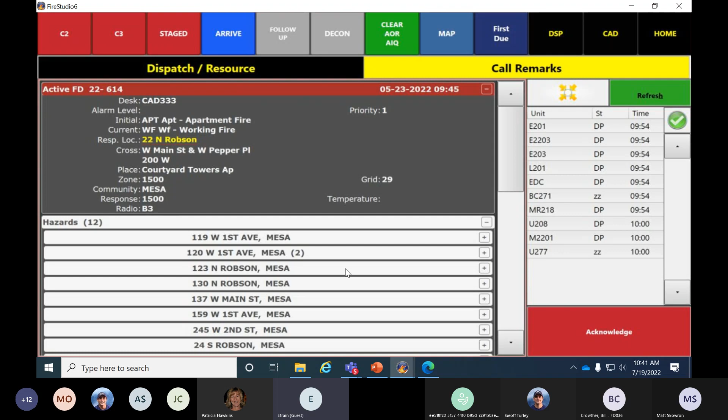But anyway, if you get dispatched here, you can look at the units. We got 201, 2203, 203. We got a 3-in-1 assignment for a working fire.

Let's see. It goes to a first alarm just because the alarm room gets some information, so it went to a first alarm for this dispatch. So you can see the crews that are responding.

You see our map here. You can see the star in the middle where the incident's occurring. You can see we've got pretty good hydrants around, three different hydrants, two on the east and one on the west side there. So we got pretty good access from a hydrants perspective and coverage.

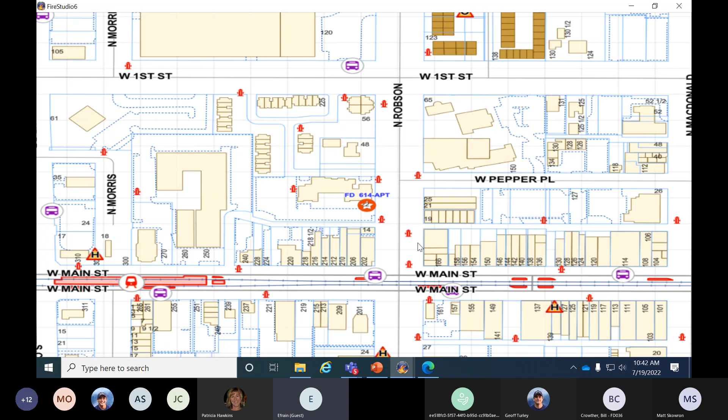This is one where, if we haven't already gone to a first, we should go to a first. We should take this to a second alarm. If we're thinking correctly, this is one we ought to come back immediately and call the alarm room and say, hey, engine 201 to alarm, we've got signs of an obvious working fire, go ahead and give me the balance of a second alarm.

Level 1 staging will be in the lobby here still, so we're going to do this. We're making our 360 here, driving. Sometimes we do and don't do this depending on whether we're the first or second unit. We may or may not do a drive-around 360.

So right now we ought to be looking at this and thinking a number of things. If we think about the training we did today, one thing that ought to come to mind is, why is this building on fire? We ought to be wondering what's going on. Do we not have sprinklers?

This is a sprinklered building, but we have active fire on the floor here. So that should make us worry about, do we have a sprinkler isolation valve that's closed here? Do we have an arson incident? Do we have a sprinkler problem? Do we have a fire pump problem?

There's about 15 things that ought to be running through your mind right now as you've requested a second and third alarm here as you're coming in.